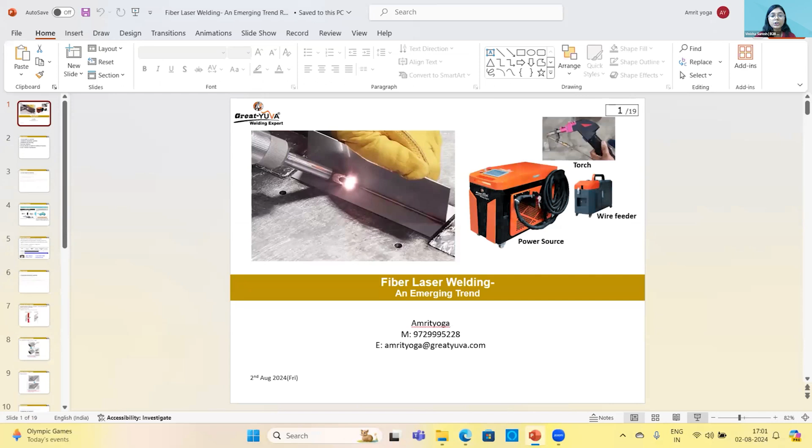He has also organized training sessions with business associations and government bodies, as well as worked with Japanese organizations such as METI and JWRI Osaka University. He is an expert in arc welding, including equipment, consumables, and shielding gases. Mr. Mishra will share his insights on fiber laser welding and emerging trends.

So today my topic is fiber laser welding and emerging trends. See, one picture is there. Here there is a laser beam which is doing the welding process. There is the power source, wire feeder, and the laser welding torch. This trend is coming very fast, and at the pace I have seen the automotive industry doing research to convert their spot welding and arc welding into laser welding, it is really very good. After 10 years, we'll see 50% of the process in the automotive industry will be laser.

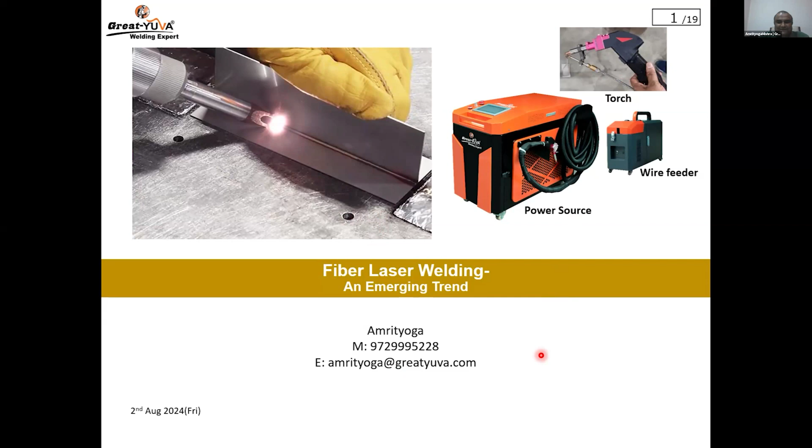Now you can see these are the table of contents. Multi-material welding, replacing resistance welding, replacing arc welding, what is keyhole welding with laser, power densities of different welding processes, and what are the main applications of laser welding.

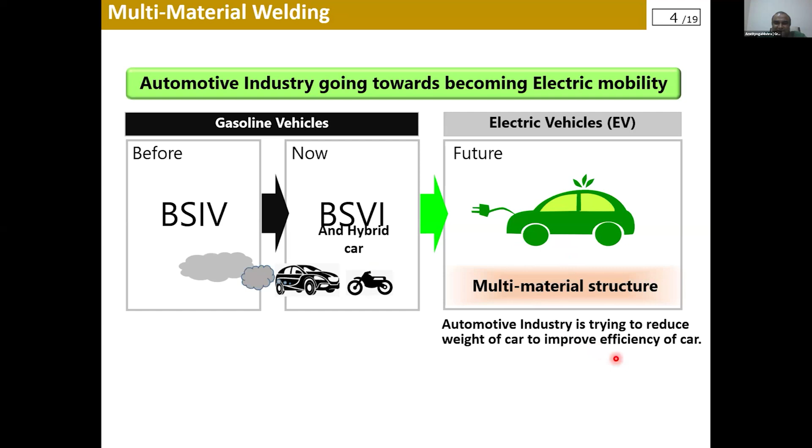Multi-material welding. See, in the automotive industry there was BS4, now there's BS6 and hybrid cars. Now the automotive industry is adopting EV technology very fast, and in EV technology they are using multi-material structures. The automotive industry is trying to reduce the weight of the car to improve its efficiency.

So industry is trying to implement new materials like multi-material rivets, CFRP rivets, etc. These are not weldable by conventional arc welding methods, therefore laser welding must be employed. With arc welding, the scope is mild steel, stainless steel, aluminum. With laser welding, which the automotive industry has started doing now, it spans MS, SS, aluminum, multi-material rivets, CFRP rivets; everything can be done. The benefit is high productivity, lower product weight, design freedom, and multi-material rivets can be used.

Why is the screen getting stuck?

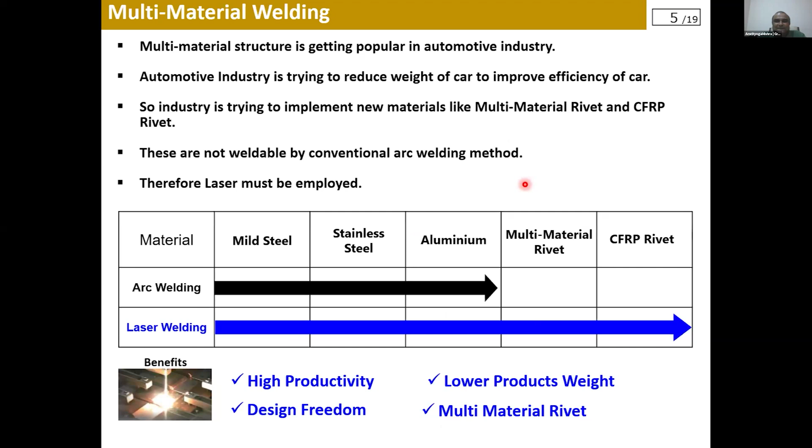Okay, now see how it is replacing resistance welding. In the automotive industry, Maruti Suzuki and these companies, I have seen laser welding is almost 6 to 7 times faster than spot welding. In future, we can anticipate that spot welding will be entirely replaced by laser welding. See, there is reduced cycle time. For spot welding, you need two-side pressing plus current. But here it is only a one-side remote process. The laser beam impinges only from one side, but welding is properly happening.

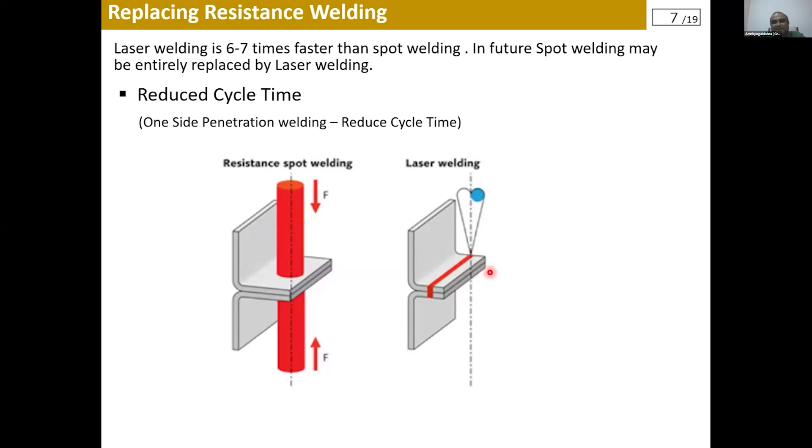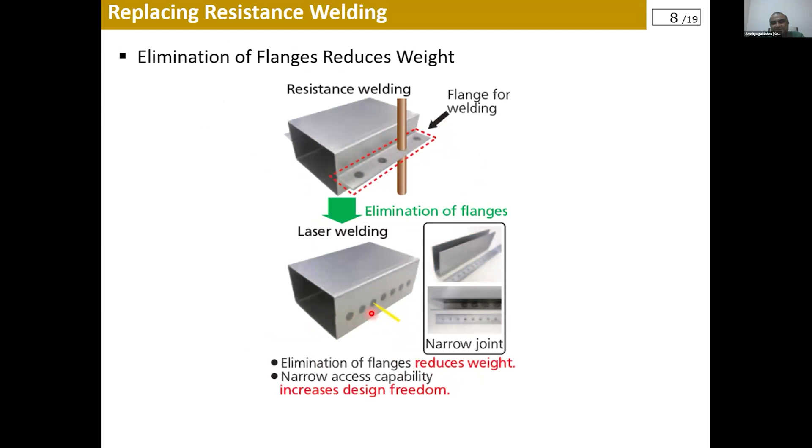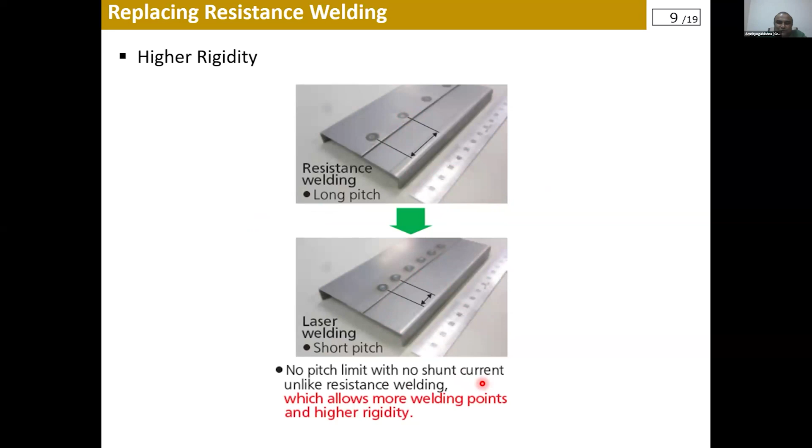Elimination of flanges gives design freedom. In resistance welding you need to have this flange. Laser welding is a remote process. So elimination of flanges will reduce weight, and narrow access capability increases design freedom. You can even reduce the pitch, the distance between these two dots. Now rigidity: in resistance welding you have to maintain some distance for the pitch. With laser you can maintain a short pitch because only the beam is falling. So no pitch limit with no shunt current, unlike resistance welding, which allows more welding points and higher rigidity.

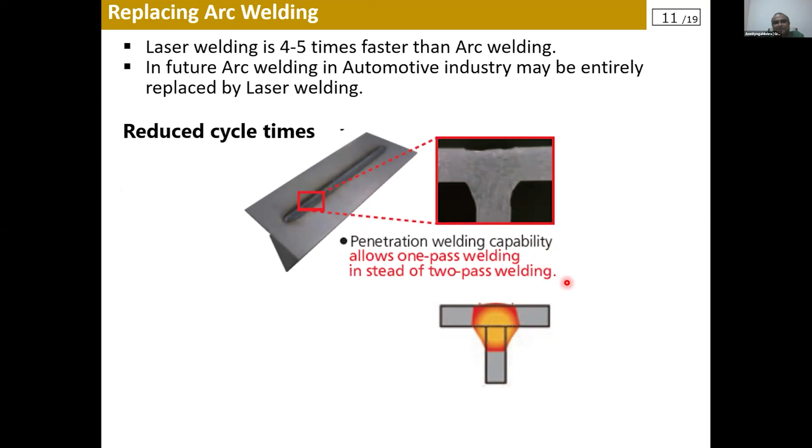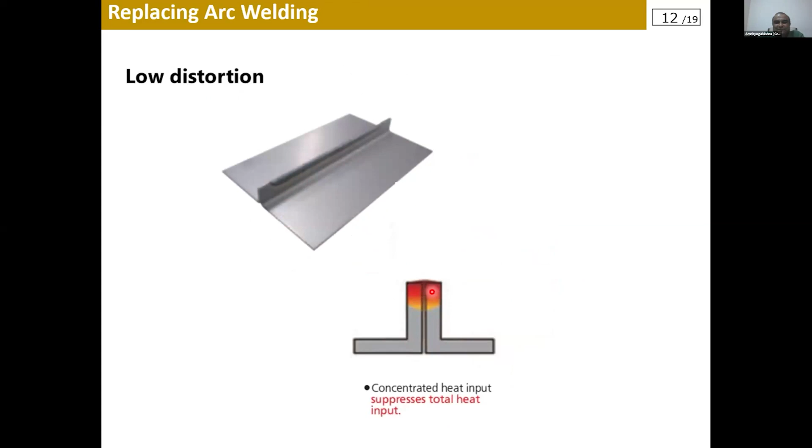See how it will replace arc welding. Laser welding is almost 4 to 5 times faster than arc welding. In future, arc welding in the automotive industry may be entirely replaced by laser welding. See the kind of penetration you are getting. Very good penetration, so penetration welding capability allows 1-pass welding instead of 2-pass welding. So cycle time is reducing. Distortion is less because it is a very concentrated laser beam, so heat input is very concentrated, giving low distortion and a low heat affected zone.

Now keyhole welding. Here there are three kinds of welding with laser: conduction welding, transition keyhole welding, and penetration keyhole welding. See how much the penetration is. Here the power density is 0.5 megawatt per centimeter square. It's increasing to 1 megawatt per centimeter square, now 1.5 megawatt per centimeter square. See how much power density.

Because of power density, the penetration is very good. High welding depth and high aspect ratio are possible; depth is high and the width is less. So the depth to width ratio can be 10:1 also. Very concentrated heat input, very strong weld, good penetration.

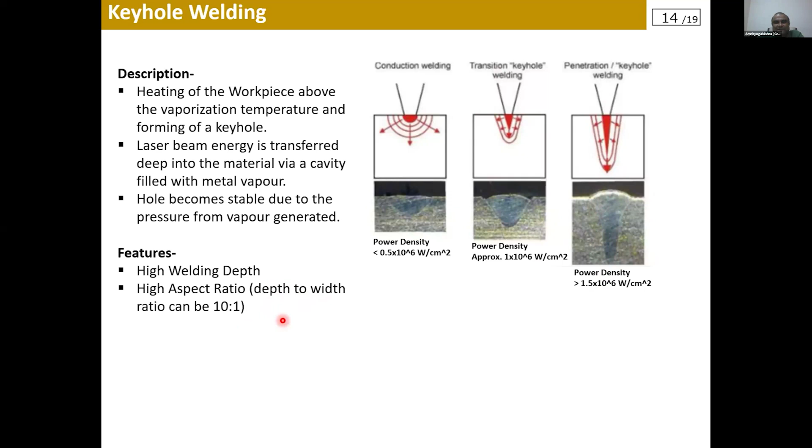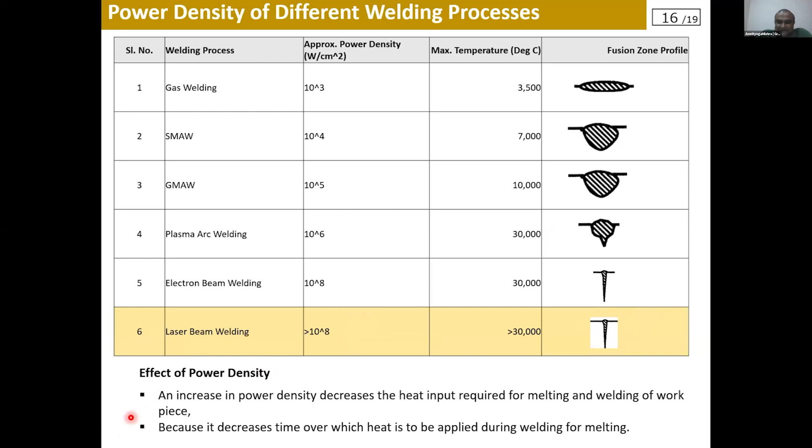Now you can see the power density of different welding processes. Gas welding, SMAW, GMAW, you see 10 to the power 5 watt per centimeter square. Now let us come straight away to laser beam: more than 10 to the power 8 watt per centimeter square. See this kind of profile. The automotive industry is really experimenting on this. Effect of power density: an increase in power density decreases the heat input required for melting and welding of the workpiece, because the process becomes faster and it decreases the time over which heat is applied during welding.